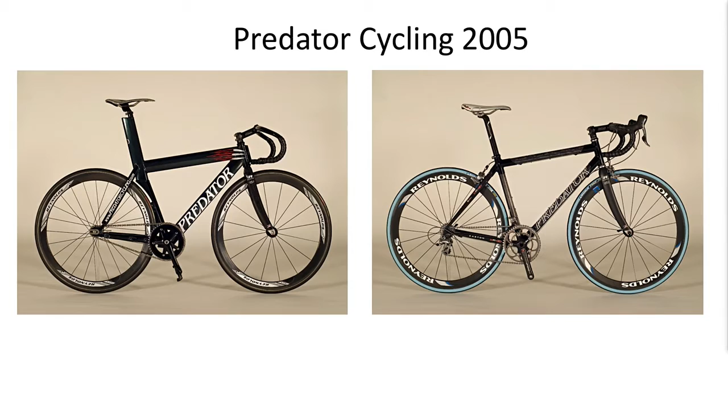We started making bicycles out of scandium, aluminum, and some small carbon fiber, which you can see here. We did primarily aluminum lugs with carbon inlays. And then this bike here is our first attempt at a super bike. This is a track bike that we did that is primarily scandium and aluminum, so 7005 series aluminum.

That's where we started. We actually started a couple years prior to this because of an off comment that I made to a bike builder, who I told that it's not that hard to make a time trial bike. And he said, if it's not that hard, you should do it yourself. So I was about 13, 14 at the time, and I did. And we made our first time trial bike about 6 to 7 months later. And then about 4 or 5 years after that, we took our brand to market.

Today, 11 years later, we are making full carbon fiber frames in-house, as well as carbon fiber components. We do all of our designing, tooling, and manufacturing in-house. And today, I run the company with my wife. In the last 3 years, we've seen this incredible growth in how we manufacture, how we do things, how we design. And a lot of it has just been the access we've had to technology.

In the last couple years, we actually took on making our own CNC in-house. We built a 4 foot by 4 foot with a 1 foot Z, basic, simple CNC router, and we started using that to make our first molds in-house. About a year ago, we started working with Fusion 360 and designing full T-spline shapes of our frames, and basically taking those shapes and throwing them right into CAM and cutting out molds. So I call it T-spline to production. We design it on the computer, we then go straight to making it.

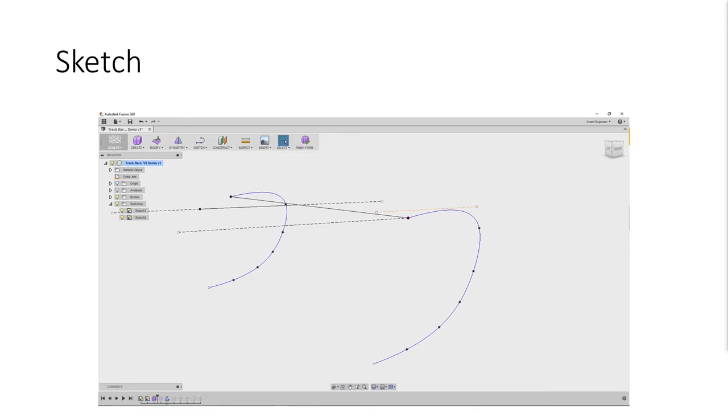And then from there, we pretty much go straight into sculpting, and we don't really get out of it. So this is our first thing. We basically do a very simple pipe, and that's where the bar starts. And the interesting thing is when you start working with T-splines, what you see in this part and how carbon fiber lays on top of it is very similar, because you're taking a shape and curving it around something. And carbon fiber is a flat woven material that we're bending over a part.

So in T-splines, when we see a crease or a mark or a hard edge, that's going to directly translate to our finished product. We're going to get that same hard edge, that same crease, and have a problem. So this has been really helpful for us because we can immediately see we shouldn't do that.

So once we get here, this is our starting point, and about 8 to 10 weeks later of playing with it, you come to this. And this is our track endurance bar that we've come up with. Every shape on this bar is for a reason. If you look at it, you can kind of see that the drop of the bar is not round. We actually thinned it out on the front profile to reduce the drag coefficient, which is super cool because now we have flow testing on our little tiny computers at work, so we can actually test it to see if it works. And you can see that there's this dip in the front of the bar.

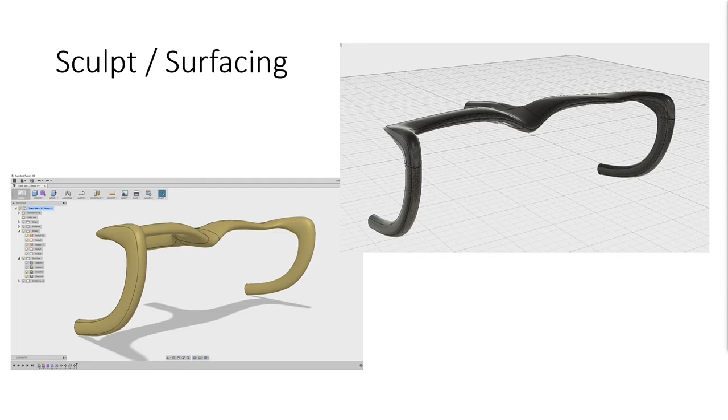So a lot of riders come from the road and want to ride on the tops there. So they have like a handle here to hold. So we basically molded that directly into the bar. And this is a one-piece, one-shot monocoque part. The rear stem knuckle that will attach like you see here is a separate piece, but we'll still call it monocoque.

So this is just a picture of our simulation that we ran on our part. In the original part where we kind of went straight across, we saw that we were getting a lot of load right in the front. It was kind of awkward. We didn't think that we would be getting load there, and in a couple of our break tests, it did break where we were showing a load. So we basically dipped it down, shaped it, put a little bit of a twist to it, extended the front nose, and we saw that it dissipated quite a bit.

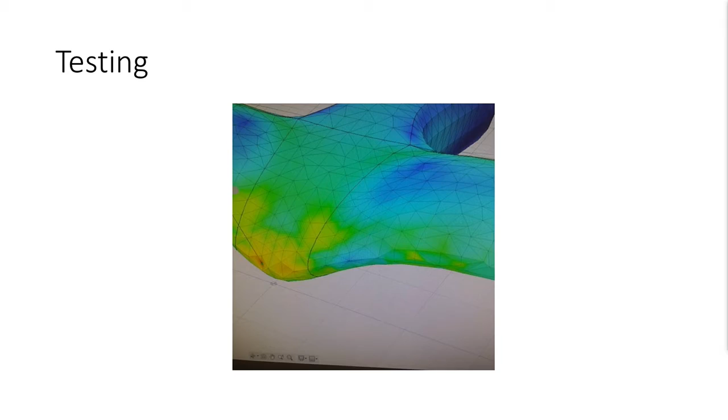We told the computer that this was steel to get the results, but when we tested in real life, the data came back that it was significantly stronger, and it was about 200% higher load to snap it on a drop test than our previous bar. And this bar prototype came in at 260 grams, where this system is coming in at 340 grams. So we were able to significantly reduce the weight of our bars. And then this is the final shape, the final one that we went to start molding.

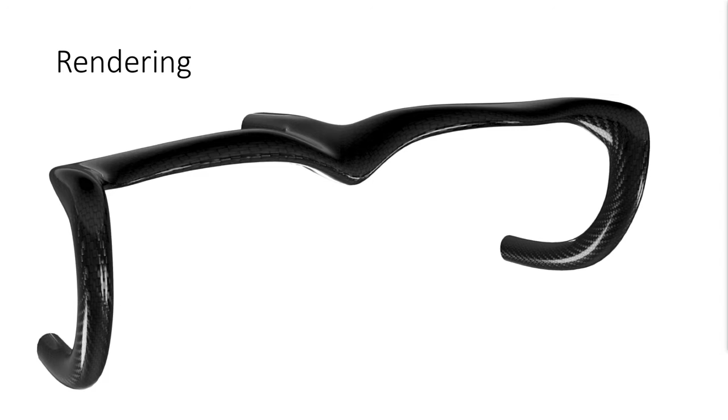Now, the way we go about molding is very different than other people. We're a very small company. To take a bar like this to market with the typical clamshell, latex bladder, pre-preg mold, with all the SKUs that we would need, we would be looking at somewhere between $150,000 to $200,000 in tooling, molds, bladders, replaceable bladders, pre-pregs, ovens, everything. Using our system here, we're doing it for under $10,000. And we're able to achieve a better quality part by having less air inside of the carbon, and a better inside of the part because, well, I'll show you the next step here.

This is our mold. It's kind of hard to tell, but this is actually slightly smaller than the previous image you saw because we build all of our molds to the core of the bar. So we don't build a mold on the outside of the bar. We actually mold it for the inside. And we came up with a pretty cool thermoplastic mix where we can inject it into this mold. This is obviously half of it. There's the other half. We basically inject it inside.

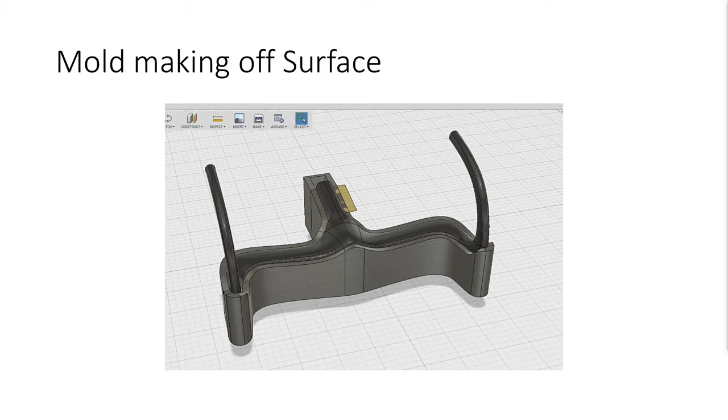We control the injection pressure. We also run vacuum through the part, and we control the temperature so that we get minimal shrinkage. For our purposes, we say there's no shrinkage. It keeps within all of our tolerances. And we basically make a core, the inside of the bar.

And once this is designed out for the inside, we go ahead and cut it out on our CNC. And we do all of our prototype testing because we're talking about 5 to 6 psi of pressure. Our tooling cost is very low. We actually make all of our prototypes using MDF, which is really cheap. It's great, and it cuts well.

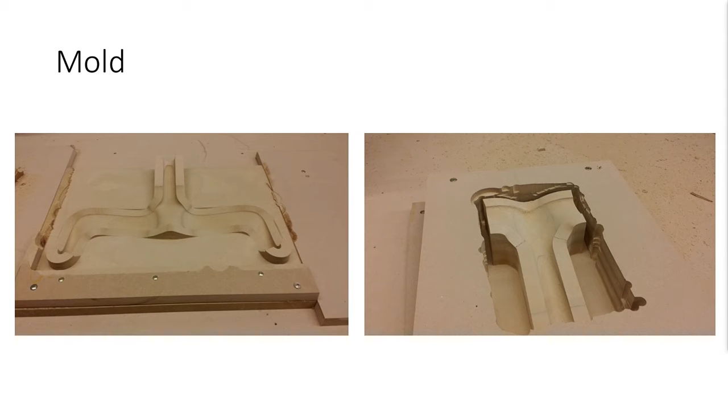So these are our original molds that you can see. They all kind of fit together. This will get us typically between 5 and 6 pulls before it dies. Now, this is a very different concept than how most bars are made today, and most bikes are made today. This is a picture of a traditional pre-preg system that you see on a mountain bike.

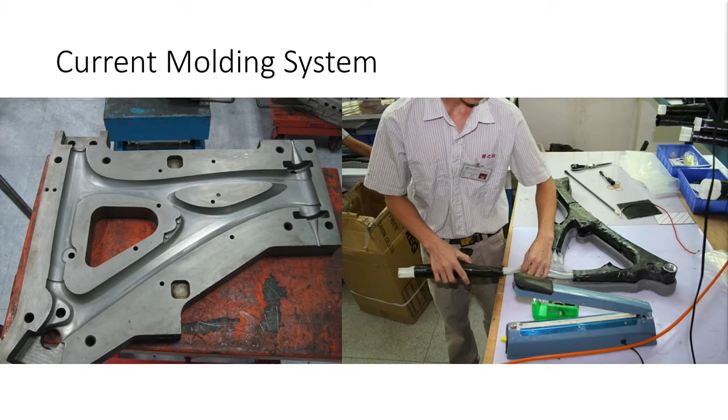You get this tool, it's a CNC piece of steel that's incredibly expensive, incredibly heavy to work with. It's expensive to cut. The machine to cut it is very expensive. And to get the bladders made and done in size is also very expensive. Our system doesn't require that. We can actually cut it out of MDF to start, and once we go to production, we can do it out of a 7075 aluminum to make the production mold so we can produce more rapid cores. Also, our core time is about 10 to 15 minutes to pull it out of the mold.

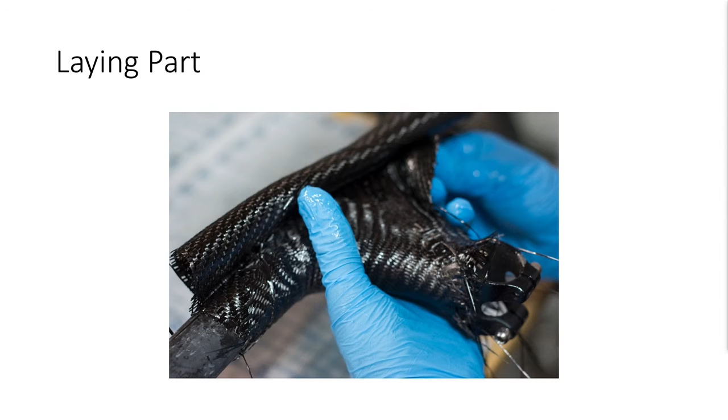And then, once you have the core done, we go to our layup. This is a picture of one of our prototypes that we laid. We don't do this exactly anymore, but I didn't have a photo of it, so sorry. We're currently doing our layup schedules based on sleeves, bidirectional carbon sleeves. So we basically define our weave orientation by the circumference of the bar. So it makes it super easy.

You can basically lay the sleeve right on, pull it flat, and because it's a bidirectional weave, the angle of the fiber is defined by the circumference of the part. So you do a simple cross-section of your T-spline shape, and you know your orientations. This is a picture of one of the bars that came out of our prototypes. This is one that came right out of the mold. This is actually version 1, so you can see there's some problems.

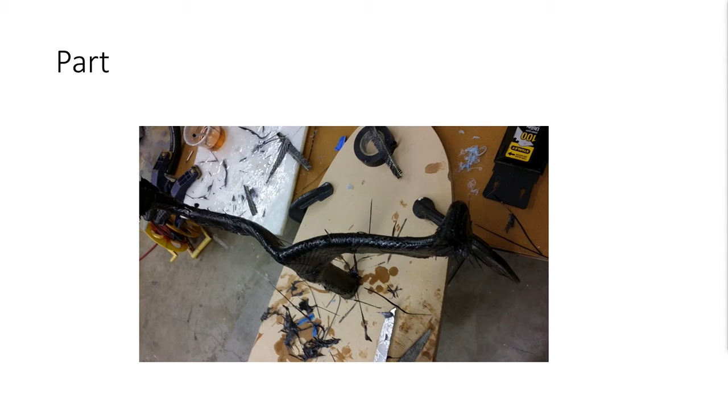We had some issues with our envelopes. But the idea is you have this finished part that now has a core. It's a thermoplastic core wrapped in dry carbon fiber. We then make an envelope that goes around that part, and then we vacuum that part. We then basically pull epoxy through it, which is a standard infusion molding process to make a composite part.

And we have a proprietary way of extracting the air out of the epoxy prior to introducing it and fully vacuuming our entire system. So we have very little air in it. We actually achieve less than 1% air in our part, which is really cool because you actually start getting competitive now with an autoclave part, which is a very expensive, very cool way to make something, but we don't have an autoclave. So we came up with this.

The other thing that's very cool is, I'm sure a lot of you are familiar with molding, and this typically would be an 8 to 12 piece metal mold to make this part. Some of you look at it and you're probably going to think it's 6 pieces, which it looks like, but when you start looking at the surfaces, it's 8 or 12, depending how you cut it. We're able to do it in a 6 piece because of the way we're molding the thermoplastic.

And in the future, we could very realistically 3D print the core. And you could make a prototype that day and make a pre-production part. As fast as you can print it, 6 hours after it's printed, you have a pre-prototype part. So it's super cool. We're also playing with the concept of making our outer envelope 3D printed so that we can have our flow media, peel ply, and final outside tooling done out of a 3D printed structure.

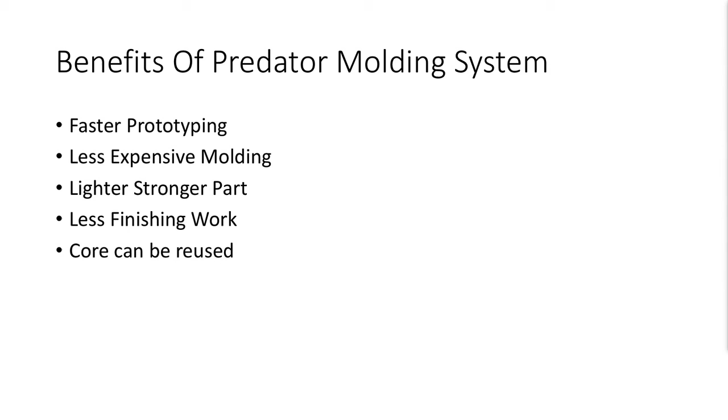As we start getting better envelopes, we can have very little finishing work compared to a traditional bagging system. And all of the thermoplastic cores we're using are completely reusable. We're actually about 95% efficient on reusing our cores. During our final cure, we can actually collect the thermoplastic and reuse it.

And our goals for this are to finish testing in the next couple months, get our products completely done, and get some third-party testing done to confirm everything we're saying. And we're going to basically move all of our products by next year to this molding system.